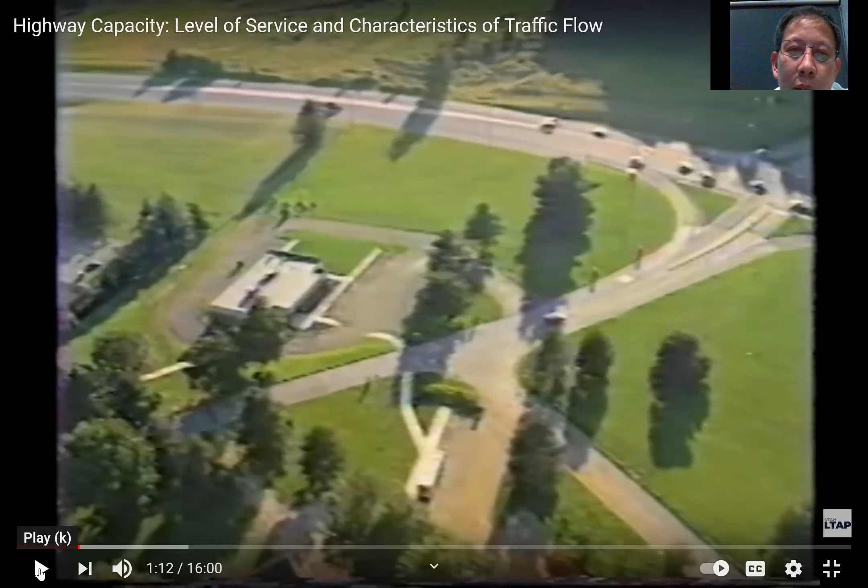Okay, let's start with the beginning, which is going to give you a little bit of overview of the American highway system. Okay, I go back a little bit.

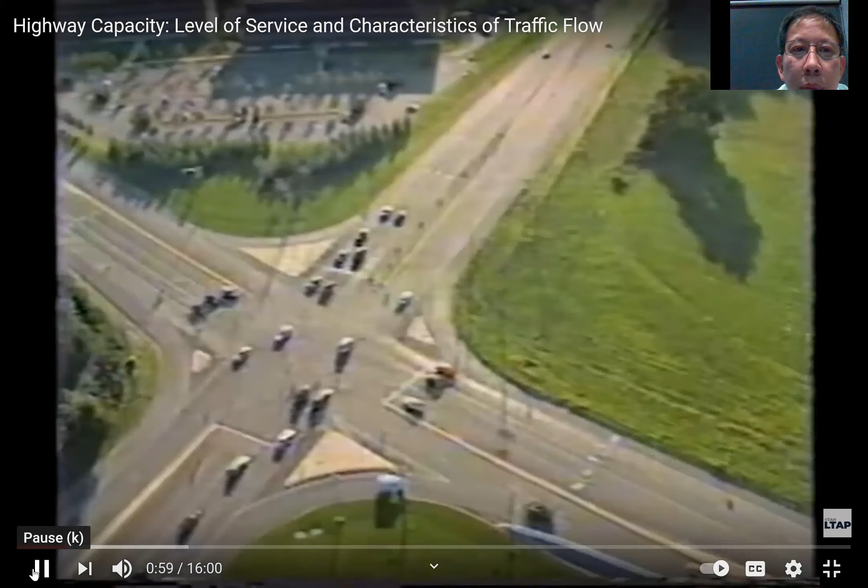Highway transportation is one of the most talked about issues in America today. With the emergence of the automobile as our primary mode of transportation, an ever-changing, ever-growing network of highways has reshaped the face of our national terrain. Yet few of us really understand how and why roads are designed. Roadways are built and rebuilt using complex engineering criteria, data, and analysis to determine what type of facility best meets the needs of the location it will serve.

Roadway design is founded upon one simple premise: improve traffic flow and safety for the people who will be using the highways. Applying basic concepts of traffic engineering, the transportation engineer interprets such factors as traffic volume, different speeds, and causes of delays to help formulate the appropriate design.

The presentation you are about to see will attempt to provide an overview of the key elements in highway design and analysis. Based on the 1985 Highway Capacity Manual, this tape illustrates some fundamental concepts and definitions used to analyze traffic flow and capacity of freeways, arterial roads, and intersections. These analyses are the groundwork for subsequent design that will upgrade the capacity and condition of our roads.

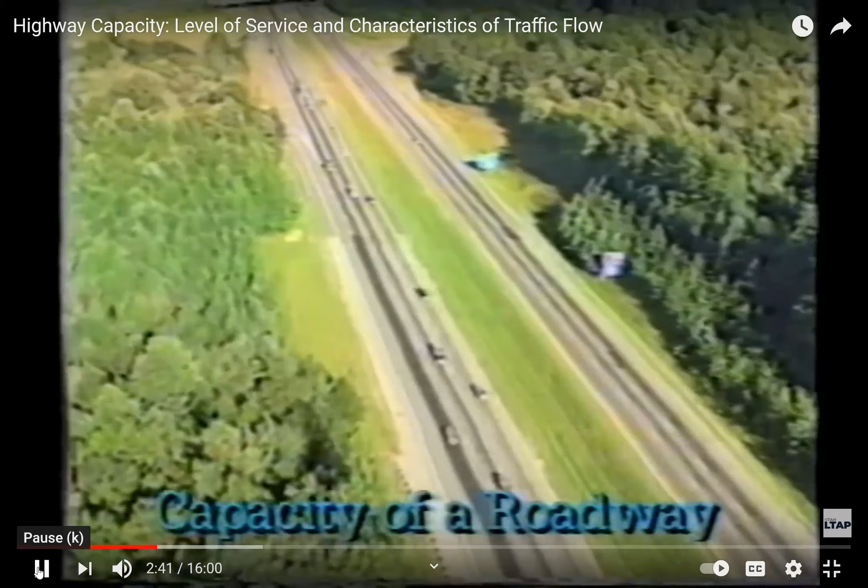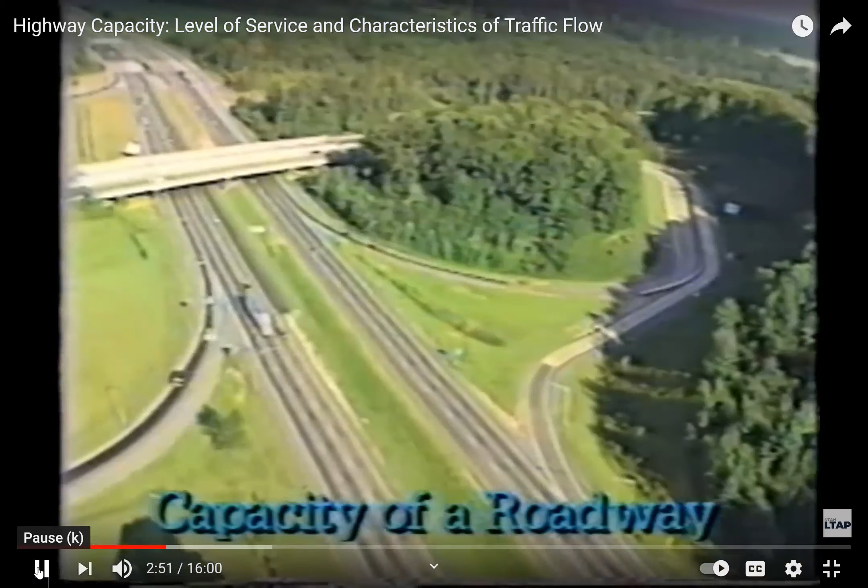The study of traffic flow and operations classifies roadways or facilities by two major categories: uninterrupted flow, such as freeways or tollways; interrupted flow, such as signalized intersections or toll plazas. Capacity of a roadway is the maximum number of vehicles that can be accommodated by any highway facility, such as a 2-lane, 4-lane, multi-lane freeway, ramp, or intersection. Capacity is also defined by the maximum volume of vehicles per hour that pass through a section of road.

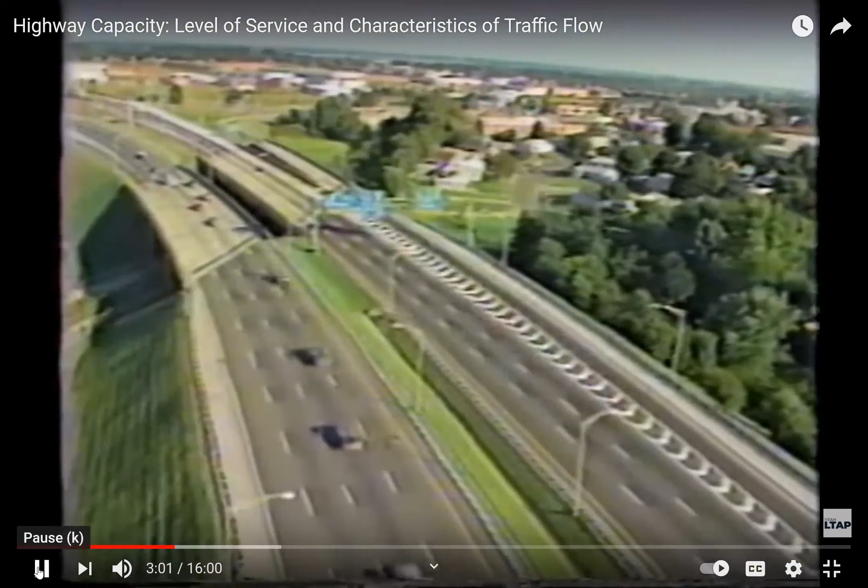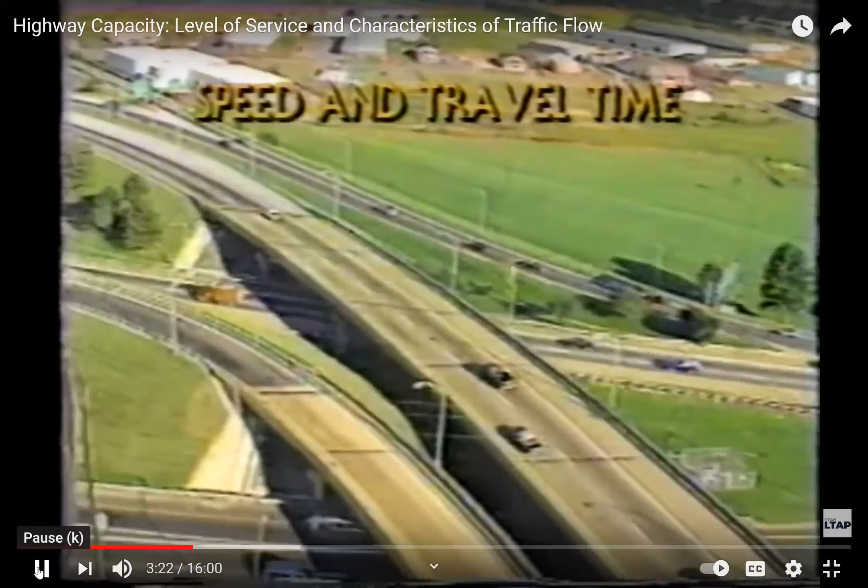Level of service is a qualitative measure used to describe the characteristics of traffic flow. The level of service describes the operating conditions within a traffic stream or the perception of same by motorists and/or passengers. Level of service, or LOS, is influenced by several factors: speed and travel time, freedom to maneuver, traffic interruptions, comfort and convenience, delay and safety.

Okay, five basic attributes: speed and travel time, freedom to maneuver, traffic interruptions, comfort and convenience, and delay and safety are something that is gonna contribute to the flow rate, okay, which imply that if these five criteria are met, the maximum capacity of that section of the road will be met. Okay.

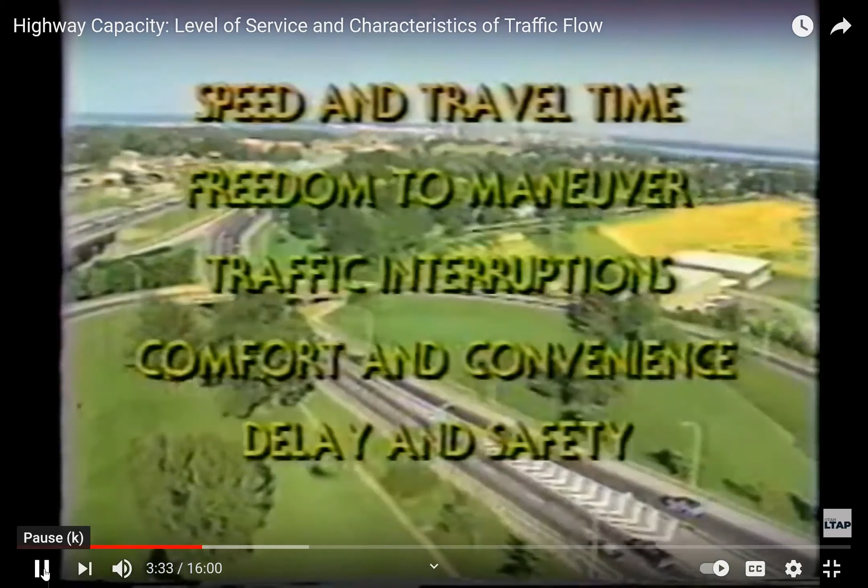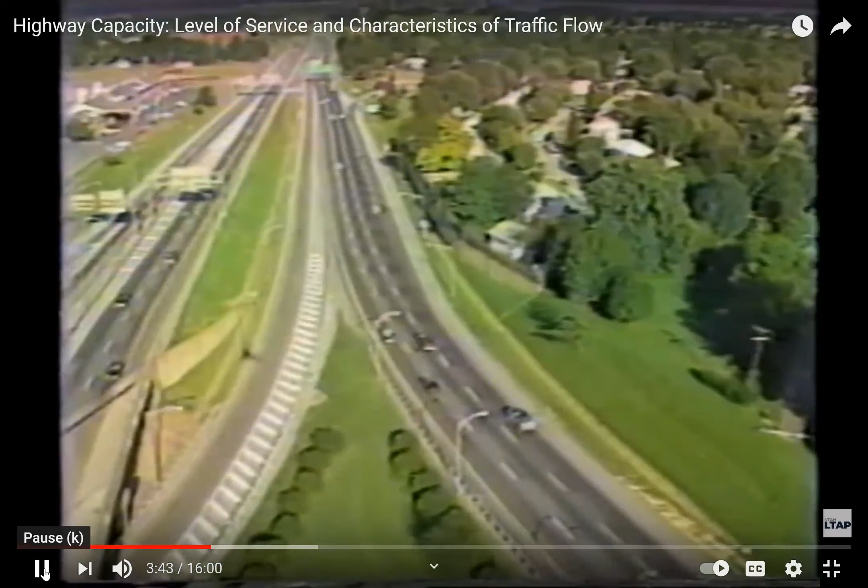The highway engineer bases the level of service calculations on features that define an ideal highway, even though actual highway conditions may vary from those standards. Those ideal features are 12-foot minimum lane width, 6-foot minimum shoulder width, the traffic stream consists of passenger cars only, all drivers are frequent travelers on the roadway and are familiar with its conditions. The highway was designed for speeds of 70 miles per hour.

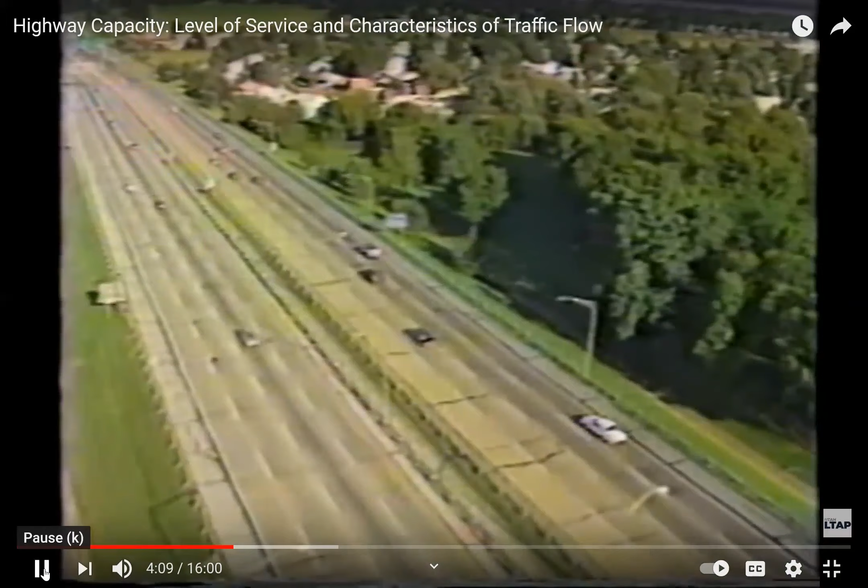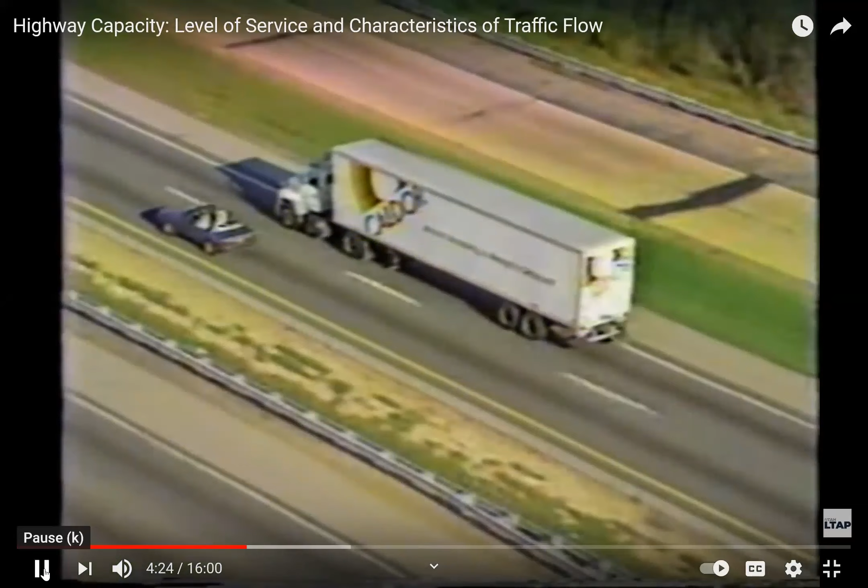There are 6 levels of service ranging from A to F. Level A is free flow and low traffic density and is the most desirable. On the other hand, level F is forced flow. Its volume exceeds road capacity, resulting in complete congestion. Let's look at examples of levels A, C, and F. Level of service A consists of low traffic density and free flow operation. The average travel speed is 60 miles per hour. The ideal volume is up to 700 passenger cars per hour per lane.

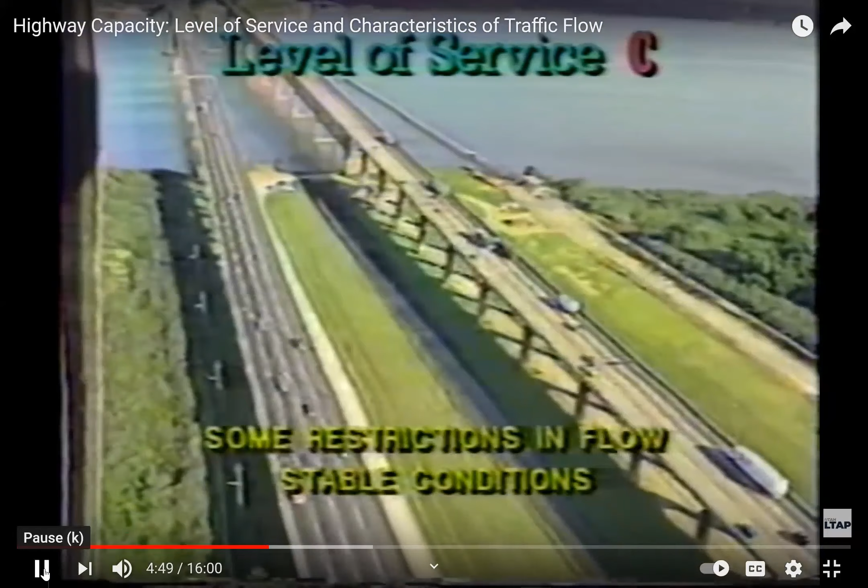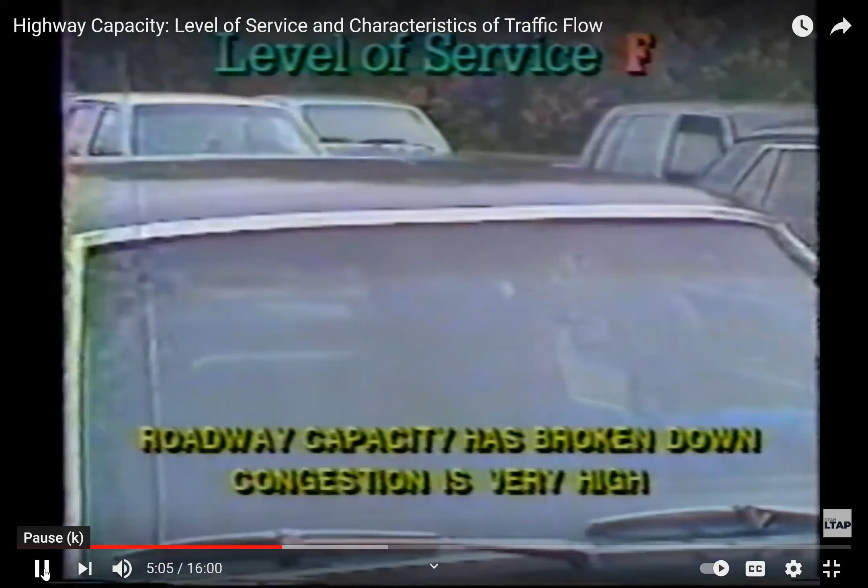Level of service C has some restrictions in flow due to a higher volume, but it is stable. Slight increases in the volume of traffic will cause substantial reductions in speed. The ideal volume for level C is no more than 1,550 passenger cars per hour per lane. In level of service F, the operation has completely broken down. Vehicles are spaced bumper to bumper. Traffic flow has now become totally unstable. The traffic volume at level F is between 0 and 2,000 passenger cars per hour per lane at best.

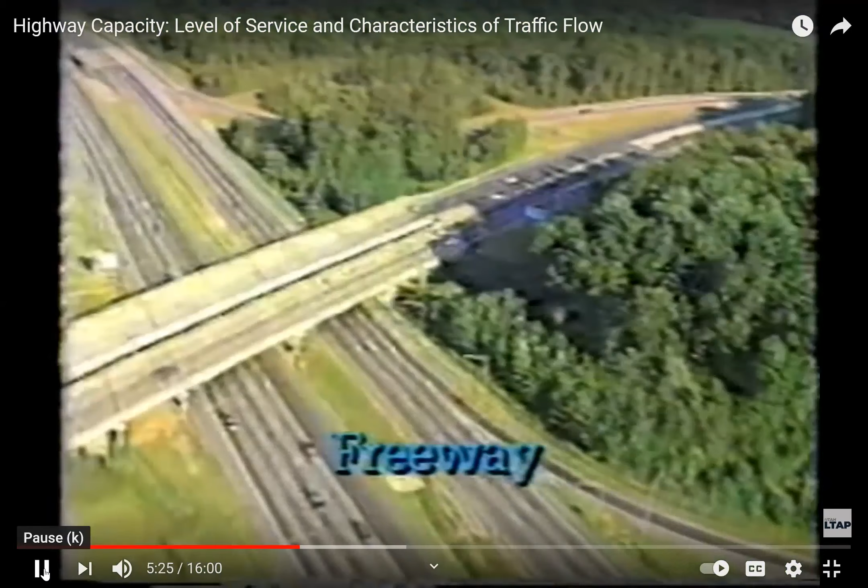A freeway is a road without intersections. All freeway entrances and exits take place at interchanges. The ideal capacity of freeways is 2,000 passenger cars per hour per lane. A 4-lane freeway, for example, will have a capacity of 8,000 vehicles per hour.

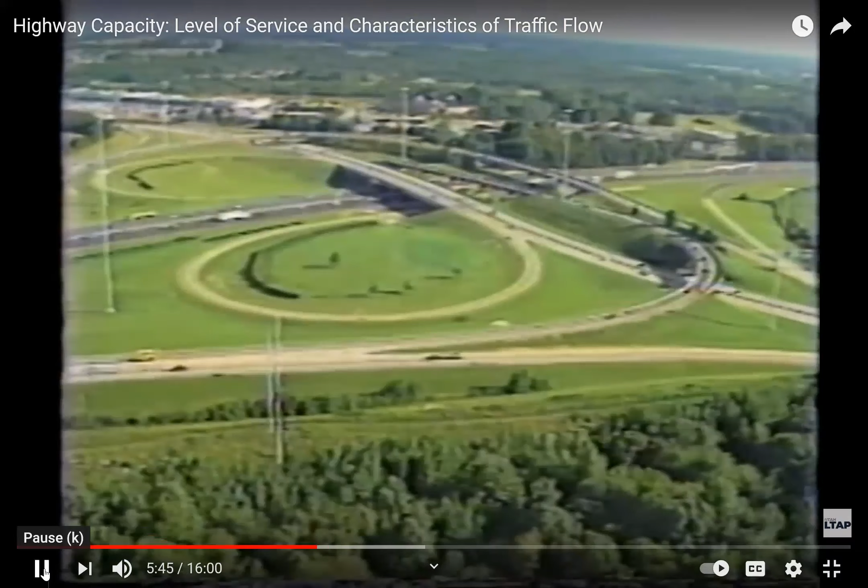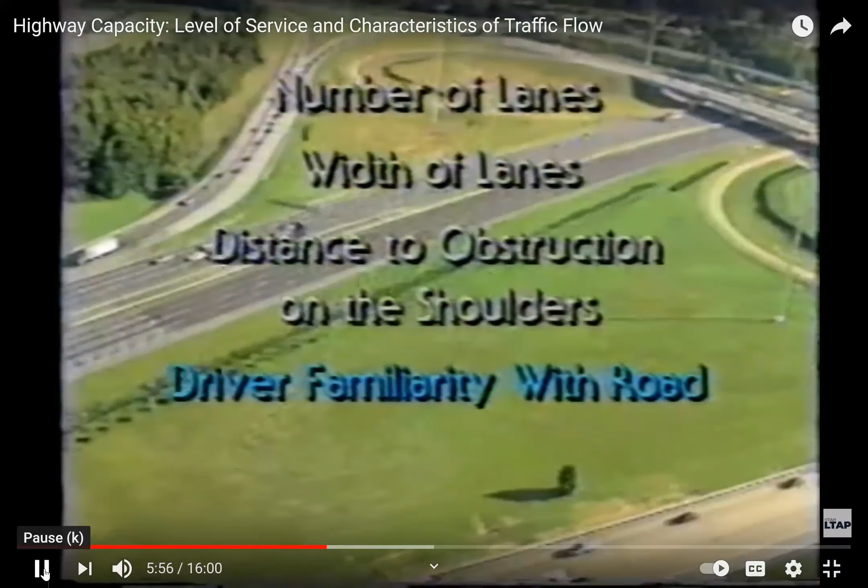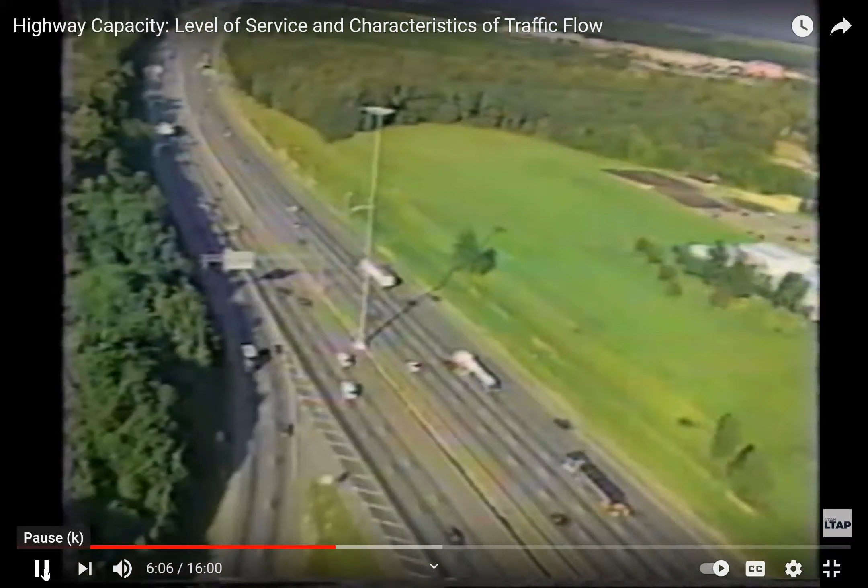In actual conditions, the total volume that can pass through a given section of a freeway is influenced by several parameters: number of lanes, width of lanes, distance to obstruction on the shoulders, driver familiarity with the road, the percentage of heavy vehicles in the traffic stream. All of these factors reduce the ideal volume to a real volume under a given set of conditions. The most significant impact on the traffic flow and capacity is generally the percentage of heavy trucks on the road.

Weaving. Okay, so they discussed the basic freeway section, and now they changed to the weaving section. Okay, now you will see this is called weaving, what you are seeing here. It is one of the most complicated phenomena of traffic flow. It is defined as the crossing of 2 or more traffic streams traveling in the same general direction along a significant length of highway without the aid of traffic control devices, signals, or stop signs. Put simply, it means changing lanes within a section of a limited length.

Weaving most commonly occurs when traffic moves into a merge area followed immediately by a diverge area. Because of intense lane changing in weaving areas, traffic is subject to more turbulence than normally found on basic highway sections. This turbulence presents special operational problems and design requirements.

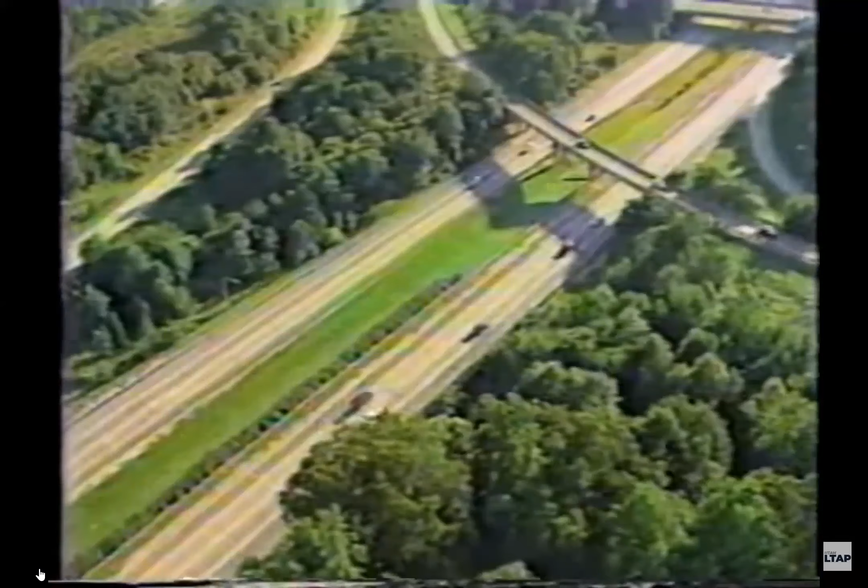Ramps are defined as the length of roadway connecting two highway facilities. Studies of ramp roadways and freeway entrances are based on special procedures which differ from standard highway analysis. The junction of the ramp with the cross street or with the street at the end of the ramp is usually a signalized or unsignalized intersection.

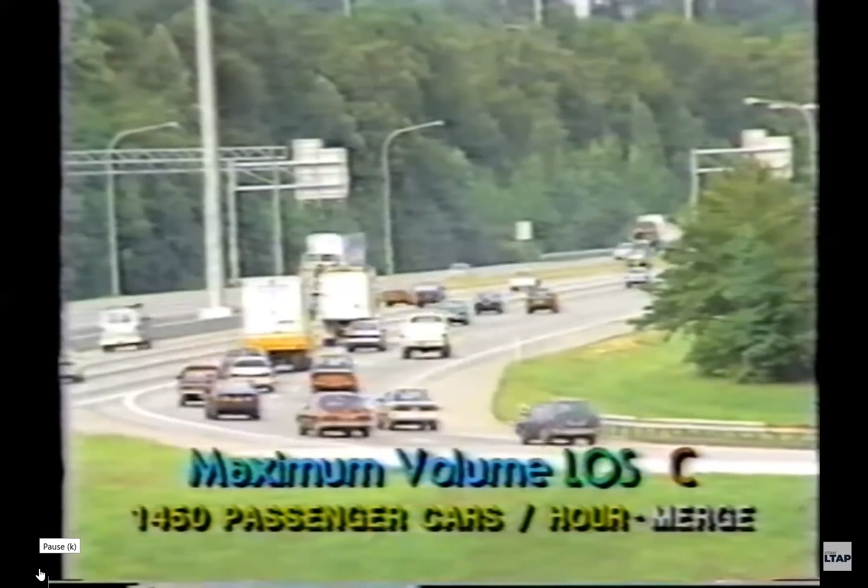Sometimes it is of interest to the highway engineer to determine the volume which can be accommodated by a given ramp junction. The maximum volume at level of service E that can be accommodated by a ramp junction is 2,000 passenger cars per hour. At a moderate level of service C, the possible volume is about 1,450 passenger cars per hour for the merge and 1,500 passenger cars per hour for the diverge.

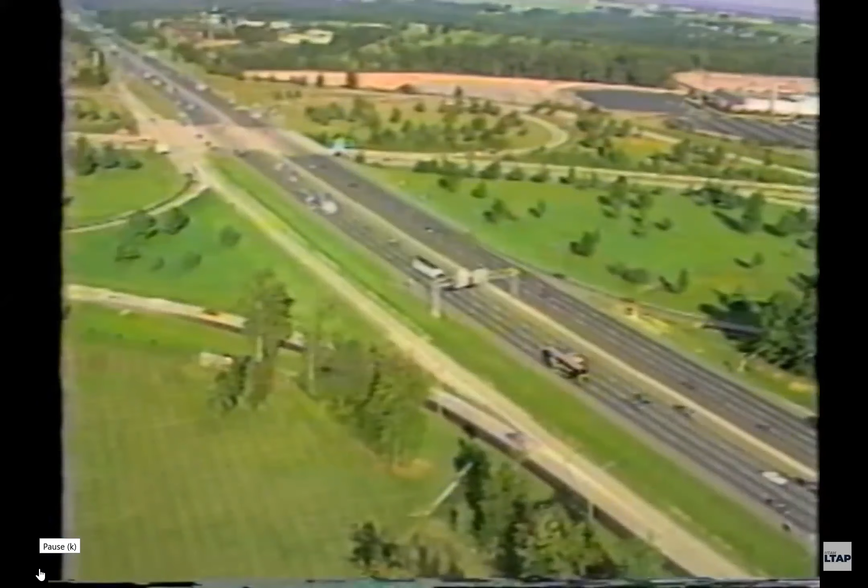The study of a freeway system integrates analysis of basic freeway sections and characteristics, such as sections without entrances and exits, weaving sections, and merging and diverging areas. So merging and diverging areas mostly happen near the ramps. So there are two types of ramps, on-ramp and off-ramp, okay? So if we talk about on-ramp, it is involved with merging, okay? If we talk about off-ramp, we will talk about diverging.

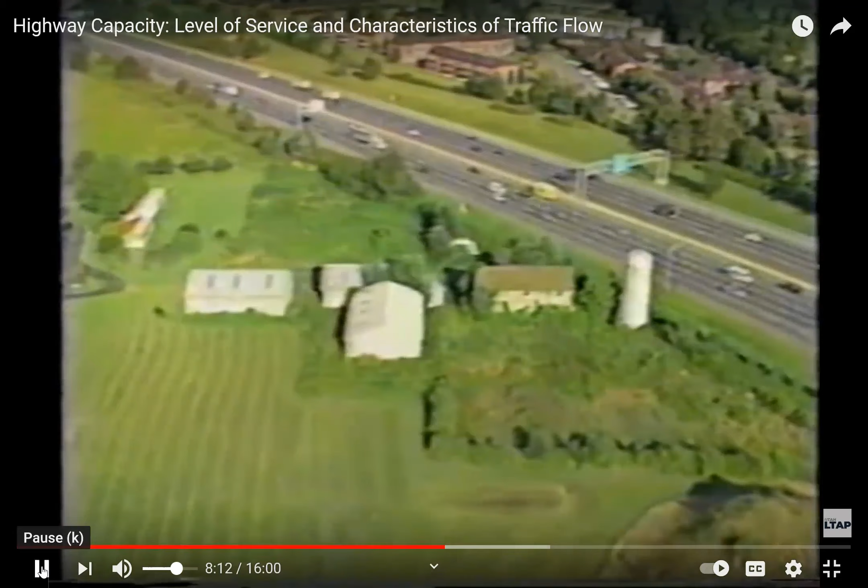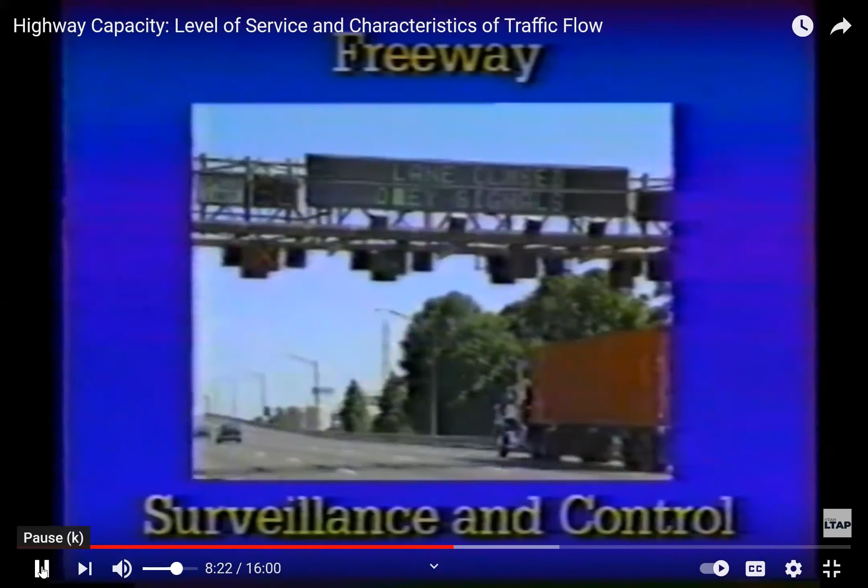Several factors can affect freeway operations in general and freeway systems in particular. The analysis must take into account the characteristics of a continuous longer freeway facility, not just an isolated section. Freeway surveillance and control. The objective of freeway surveillance and control is to maintain traffic flow at or near capacity and to minimize the impact of breakdown conditions.

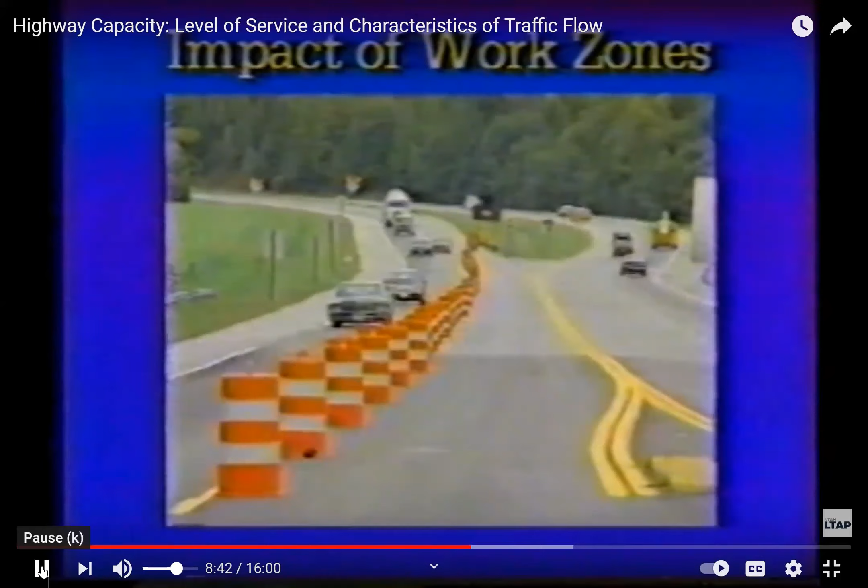Impact of work zones. The roadway system needs to maintain a continuous reconstruction, rehabilitation, and maintenance program in order to keep it in good operating condition. The engineer needs to know the impact of a construction project on the traffic flow. The capacity of work zones predicts the decline in volume caused by lane restrictions during freeway reconstruction. The reduction in work zone capacity is greater than the relative reduction in the number of lanes.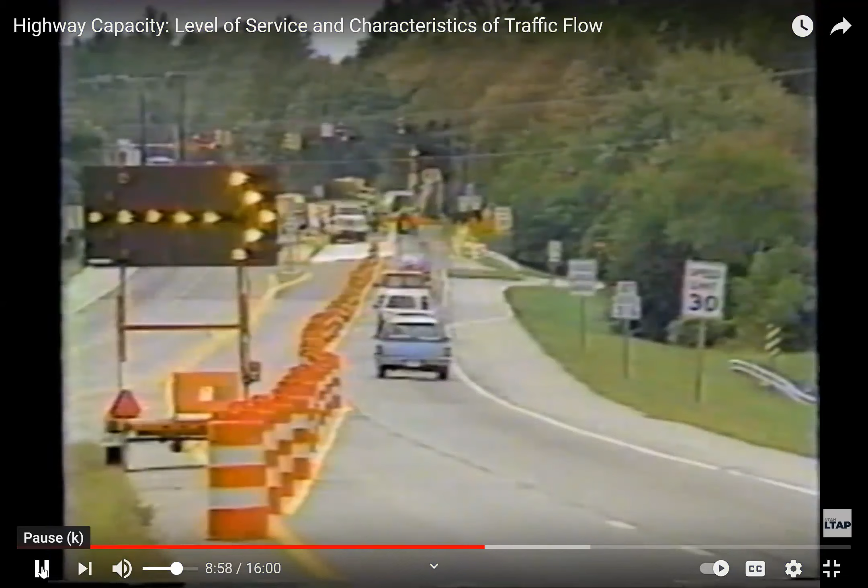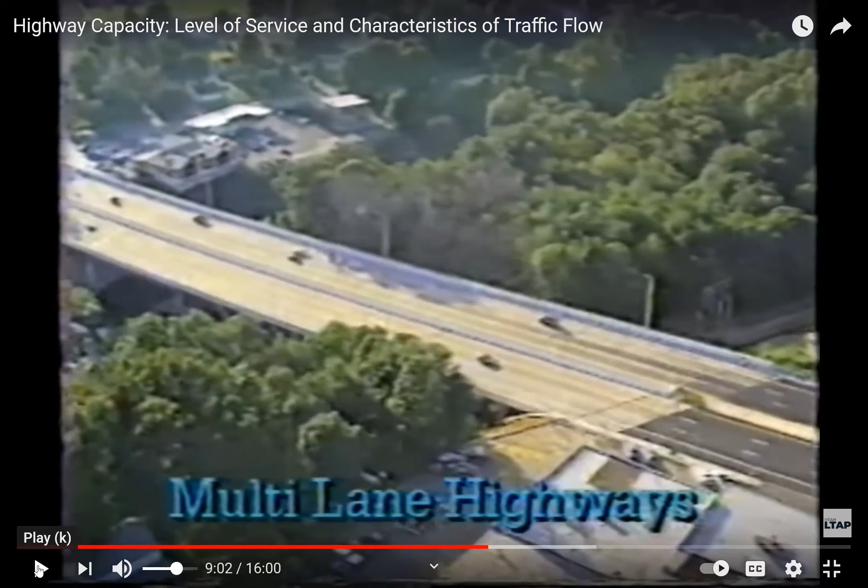On multi-lane highways... Okay, they talk about freeway, they talk about on-ramp, off-ramp, and now they change to multi-lane highways. Okay, so you have to see some different configurations of facilities here. The flow is normally uninterrupted. For the flow to be considered uninterrupted, a minimum of 2 miles between signals is required. Closer spacing classifies the route as an arterial road. Speed on multi-lane highways is more sensitive to the volume than freeway speed.

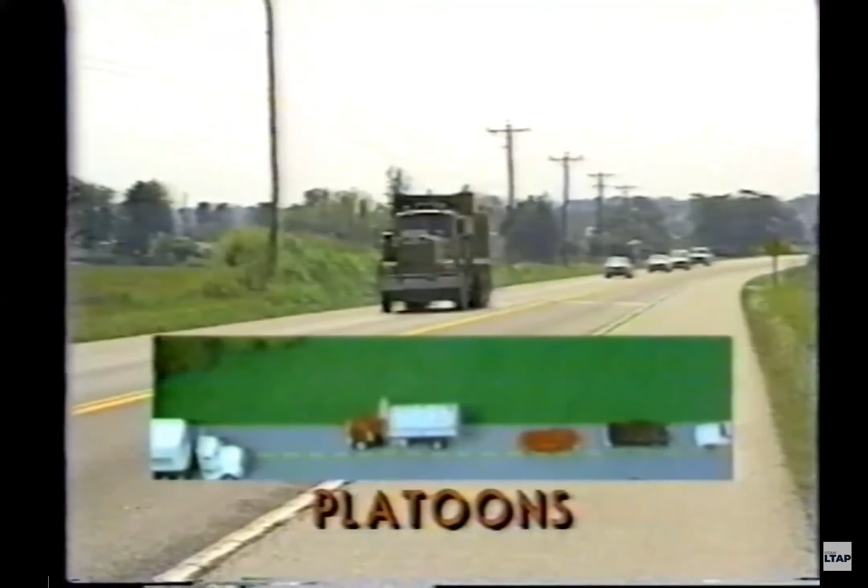Two-lane highways differ significantly from other roads. The basic operational problem is the formation of so-called platoons behind slow-moving vehicles, typically trucks. Opportunities to pass may be restricted by opposing traffic and/or by limited sight distance. Another important factor is the friction which exists between the two lanes, since each lane is closely affected by traffic in the other. Therefore, total flow in both directions must be analyzed. The ideal capacity of two-lane highways has been established at 2,800 passenger cars per hour for both directions.

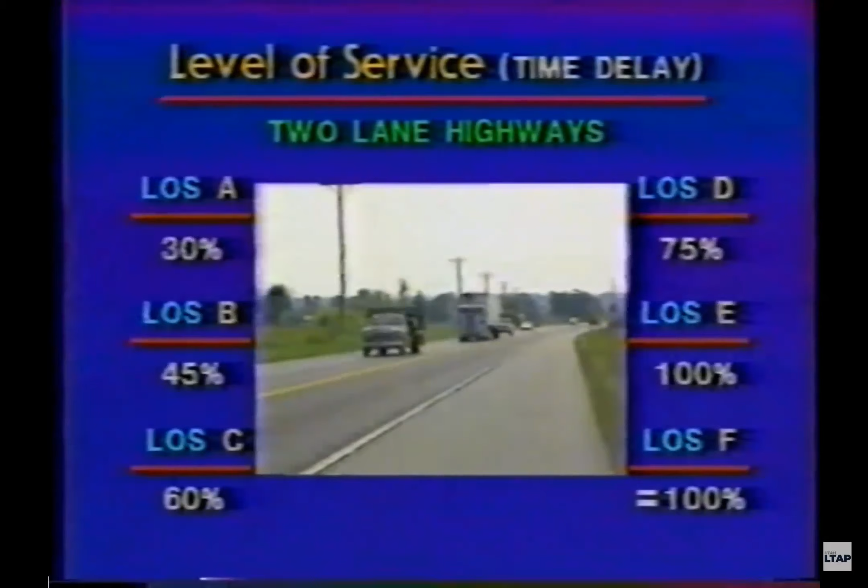5 basic parameters determine actual capacity of two-lane highways: the percentage of no passing zones in the road, type of terrain, such as level, rolling or mountainous, or grade of road, percentage of heavy vehicles in the traffic stream, the directional distribution of traffic traveling in each direction, the width of the lane, and the shoulders. The level of service measurement for two-lane highways is the percentage of time delay. This is defined as the percentage of total travel time during which a driver in a platoon is behind slow-moving vehicles and is unable to pass. For example, at level of service A, a driver would travel behind a truck for 30% of the time.

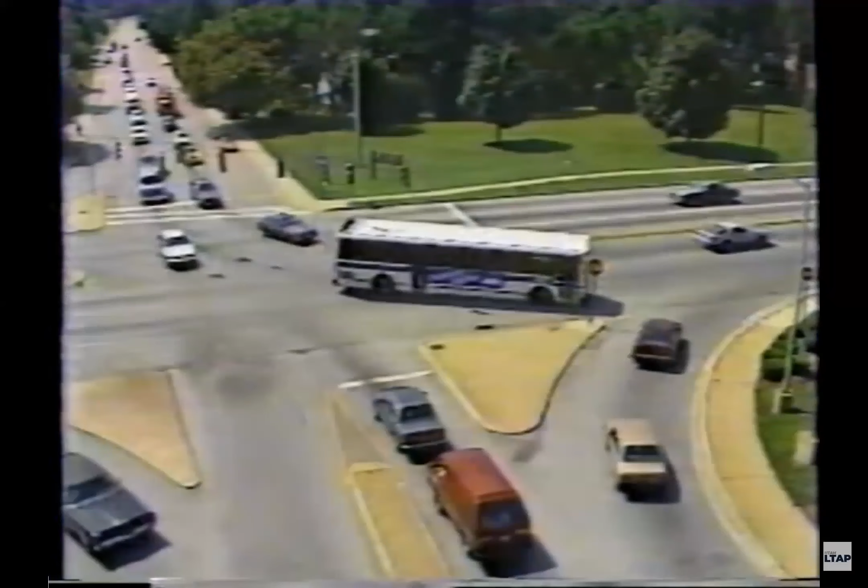The congestion and delay at signalized intersections have a significant effect on most drivers: people who travel to school, people who travel to and from work, people who travel to shopping or social events. Analysis of signalized intersections is based on the most frequently used movements of the intersection. It focuses on lanes or groups of lanes which control the requirements for green time allocation. The average stop delay of a vehicle at an intersection during a 15-minute period serves as a criterion for the intersection's level of service. For example, during level of service D, the stop time delay of vehicles stopped at a light would be approximately 40 seconds or less.

These delays are highly dependent on the quality of the signal progression, the length of the signal cycle, the green times, and the volume to capacity ratio. The operation of signalized intersections is affected by a wide range of variables. Generally, they fall into three classes: traffic characteristics, roadway configuration, type of signal control.

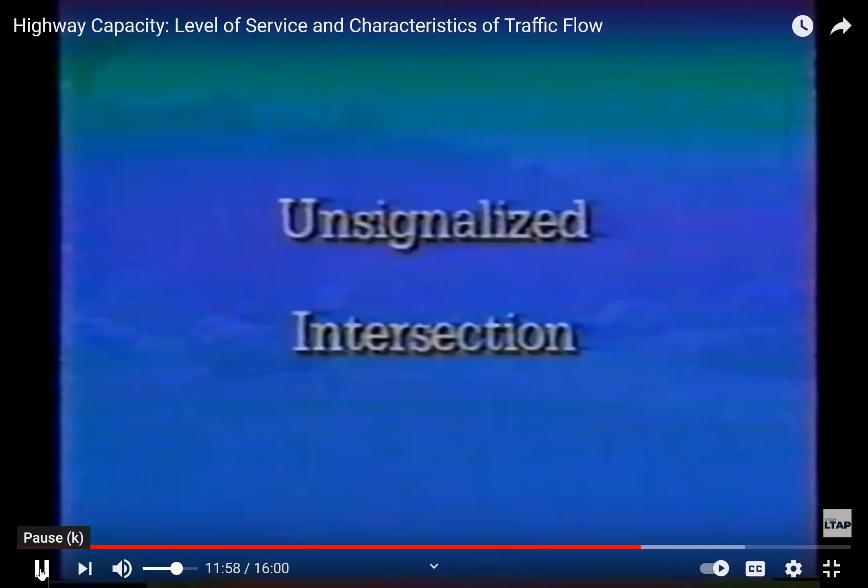Unsignalized intersections are usually controlled by stop or yield signs. These intersections are commonly analyzed by the capacity and operation, that is, by calculating available capacities, delays, and average length of a line of traffic stopped at the intersection. At unsignalized intersections, the right-of-way is always given to the major street. Drivers on the minor street must let the main street drivers pass before merging into, turning onto, or crossing the main street traffic flow.

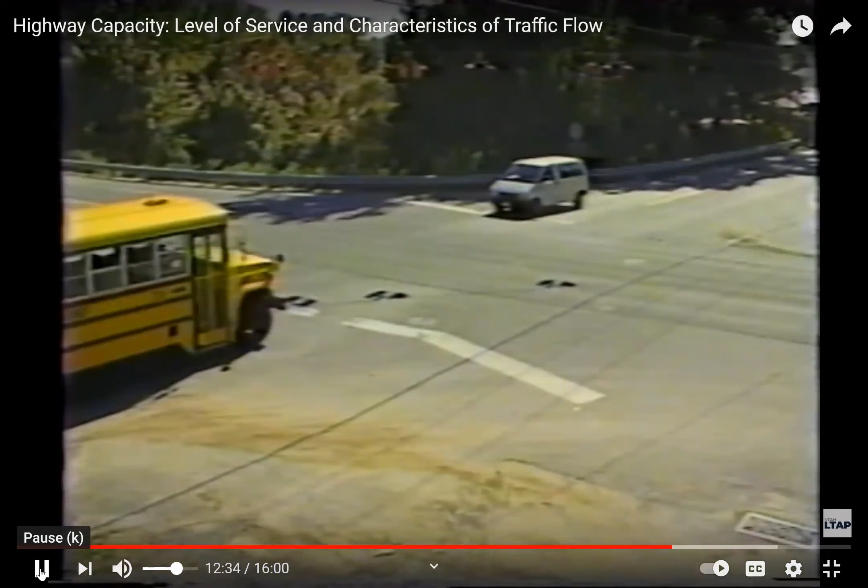Analysis of unsignalized intersections is based on the acceptance of space interval between main street vehicles and drivers on the side street. The driver on the minor street evaluates the interval and accepts it or rejects it. If the interval is accepted, the driver pulls onto the main street. If it is rejected, the driver waits to evaluate the next gap interval.

A left turn lane is important to the safety and service of unsignalized intersections. A road with left turn lanes into supermarkets, shopping strips, or developments normally has a better safety record and reduced delays and interruptions for through vehicles.

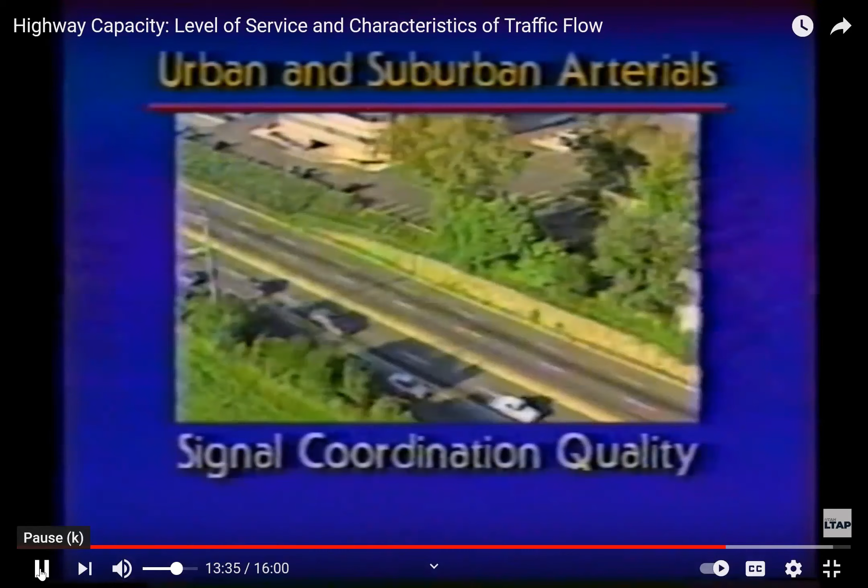Spacing of signals at less than 2 miles apart qualifies a major road as an urban or suburban arterial. Because of traffic signal cycles on these highways, vehicles often travel in platoons. The quality of operation is controlled primarily by two factors: signal coordination quality, and level of service at individual intersections along the highway.

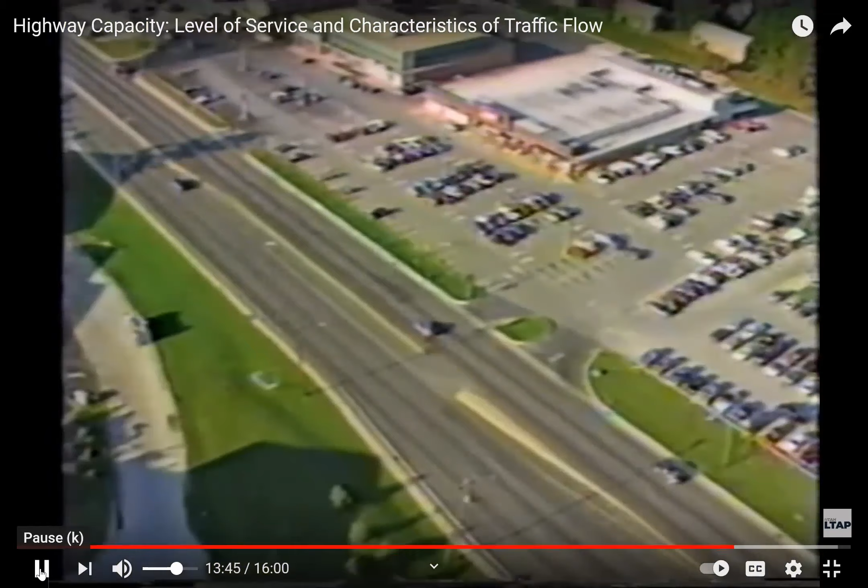Since signals control vehicle flow, the capacity of arterial streets depends on the capacity of its signalized intersections. Arterial level of service is based on the average travel speed for all through vehicles on the arterial under consideration. In addition, several other criteria come into play when planning a new facility or upgrading an existing one. Those criteria include number of signals per mile, speed limit, pedestrian interference, and roadside development.

Arterials with many closely spaced signals may operate at a lower level of service than arterials with fewer signals. This suggests that closely spaced intersections may have a negative effect on traffic flow, and special design measures, such as improved coordination between signals, may be needed.

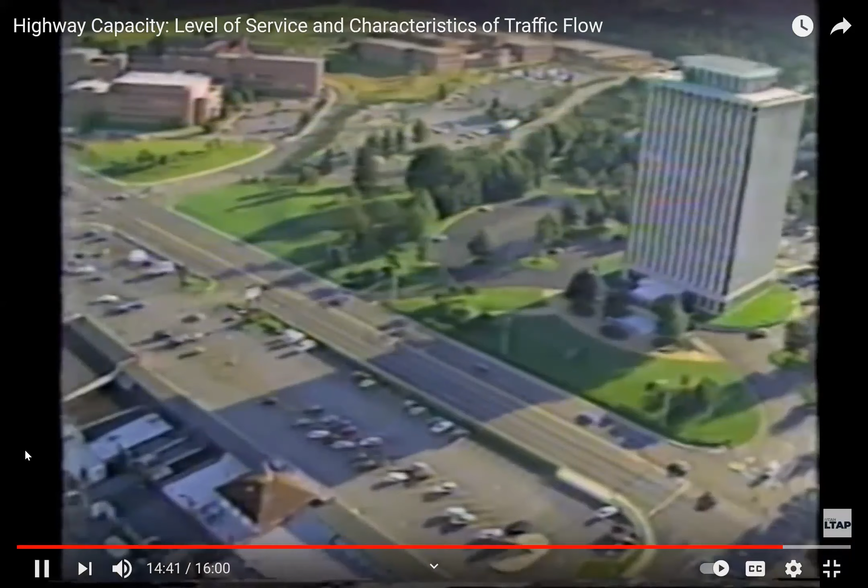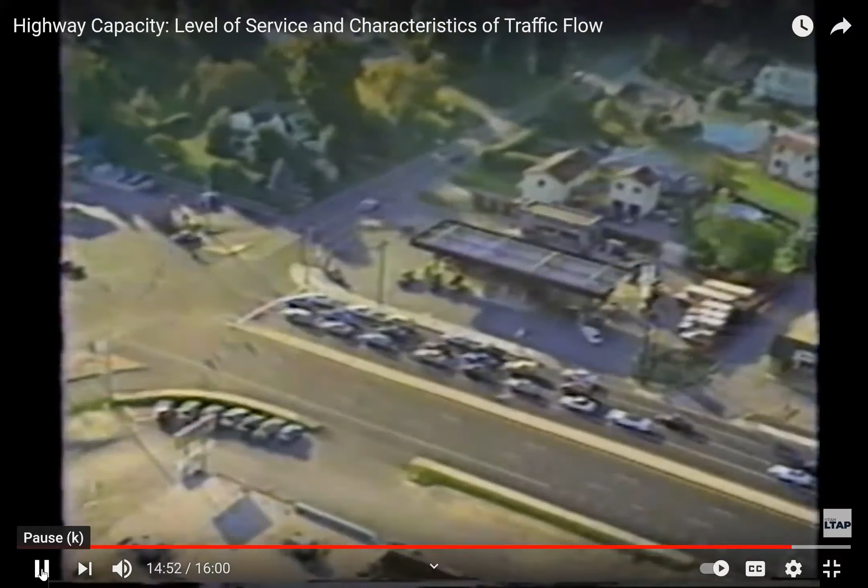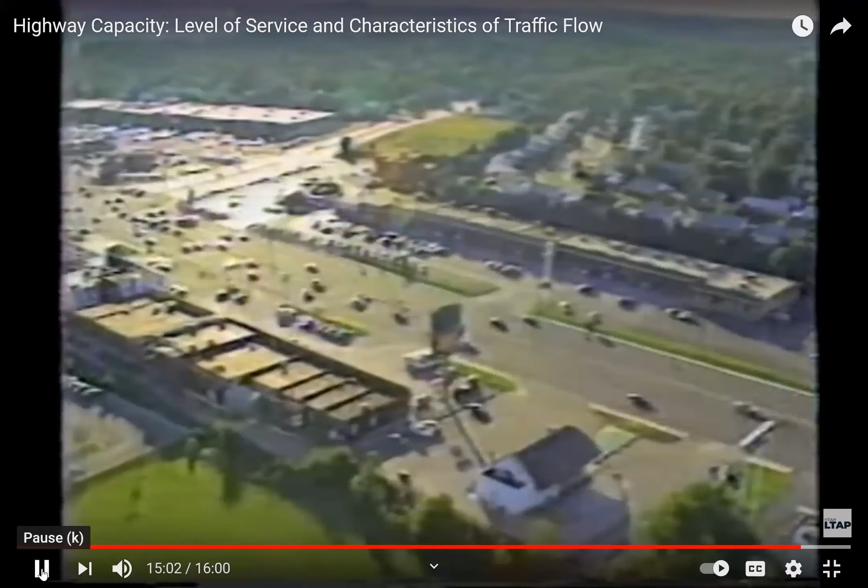Roads are a critical part of the infrastructure that supports growth and land development. Over the last decade, we have witnessed increased citizen concern about roadway construction, placement, and effect on the community. Citizens play an active role today in land rezonings and regulatory activity, issues which impact upon road development. A general understanding of transportation engineering concepts and definitions will help civic and political leaders better understand the rationale behind proposed roadway design and to make more informed decisions about the highway infrastructure.

Okay. If you want to repeat that clip, you can search it on YouTube. You can search for highway capacity and level of service to watch it again. I cannot find one that has comprehensive information about the differences between the definitions of highway, freeway, those kind of things. I thought only this one is quite comprehensive.

The movie I think was made maybe 15 or 20 years ago. It's quite old, and they've been using a helicopter rather than a drone. I think if somebody can do this kind of thing, it's going to be good for students and for others to understand the concept of freeways, highways, intersections, and those kind of things.

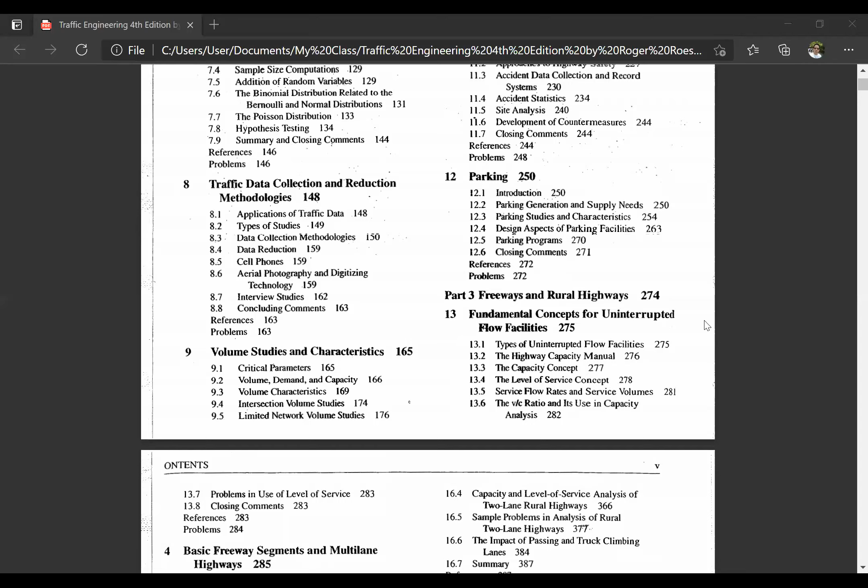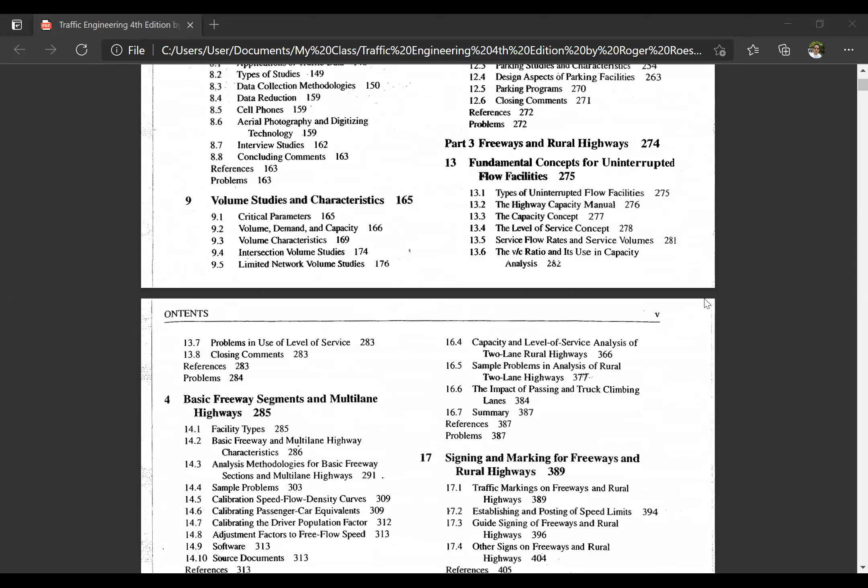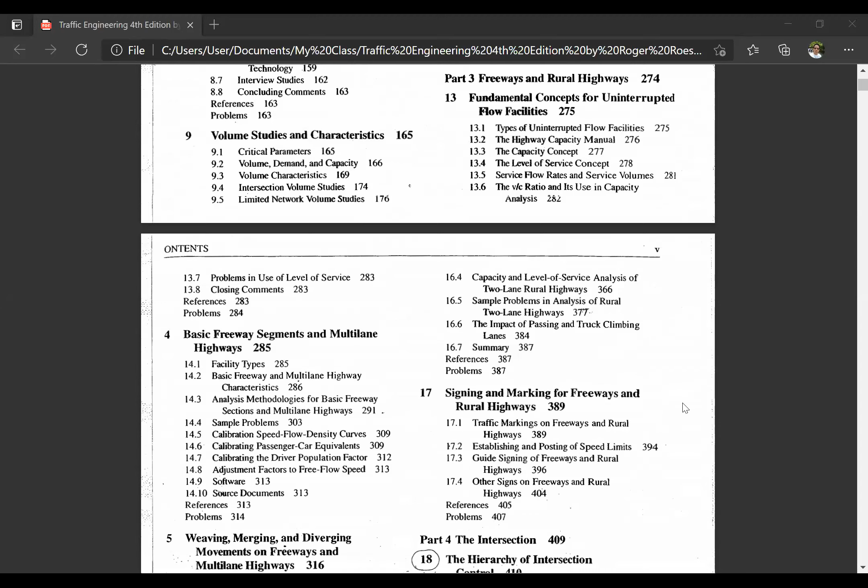Okay. So if you remember, I sent you this file to download already, right? Traffic engineering, and I come back to chapter 13, which I'm gonna talk about today, about the fundamental concept of uninterrupted flow. Okay. Chapter 13. Okay.

I think the purpose of this chapter is to let you guys understand various objectives. First, to understand the meaning of capacity, and this, like I said, is the heart of transportation issues. Why is capacity the heart of transportation issues? Can you guys guess?

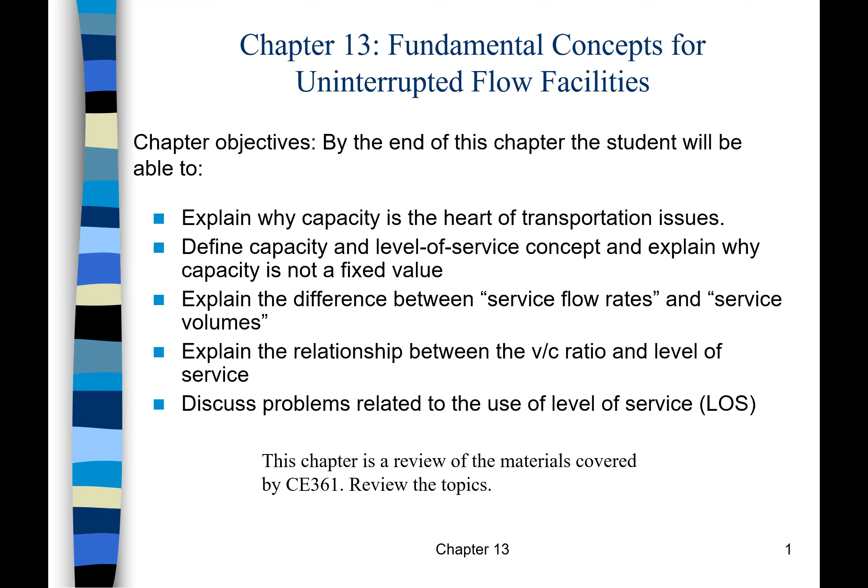If it's over capacity, what happens? Definitely, the speed and the flow cannot go as expected, as designed. So it becomes level of service F, which you have seen in the video clip, that level of service F is bumper to bumper congestion, right? Okay, and later on, they talked about the use of level of service. What is the problem about how to use this? If you notice, the term level of service is rather hard to understand, because you need to look a little bit closer at how to define the level of service. And the level of service of a freeway segment, of a multi-lane segment, of an intersection, of the ramp, they are totally different too. So I give you a heads up why it's a problem, okay?

So, types of uninterrupted flow facilities. I think you have seen it on YouTube earlier already, okay? Anyway, in this chapter, we're gonna discuss uninterrupted flow.

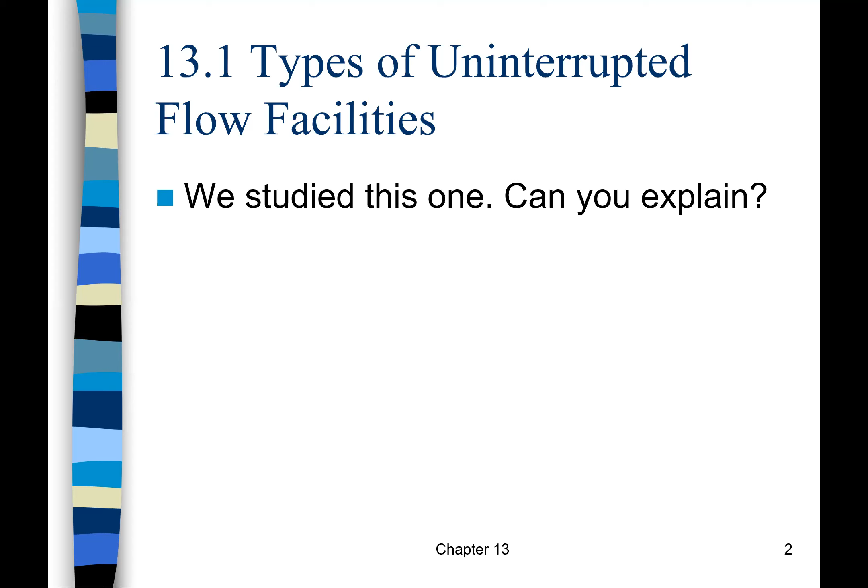In the HCM, or Highway Capacity Manual, it talks about how much traffic a given facility can accommodate. This is the meaning of capacity, okay? But the HCM has been developed in many versions. And I think the version in the clip that you just saw was 1985, okay? The 1985 one is the one that we saw.

But the one that we study is 2010, okay? It's 2010, and it hasn't been edited again. I heard that they were updating some chapters, especially things that involve autonomous vehicles. Autonomous vehicles, I think some of you may already have learned about, cars that drive by themselves. Many projects in China, America, Singapore, or South Korea started doing this type of vehicle in commercial mode, but they haven't reached the highest level, which is fully autonomous.

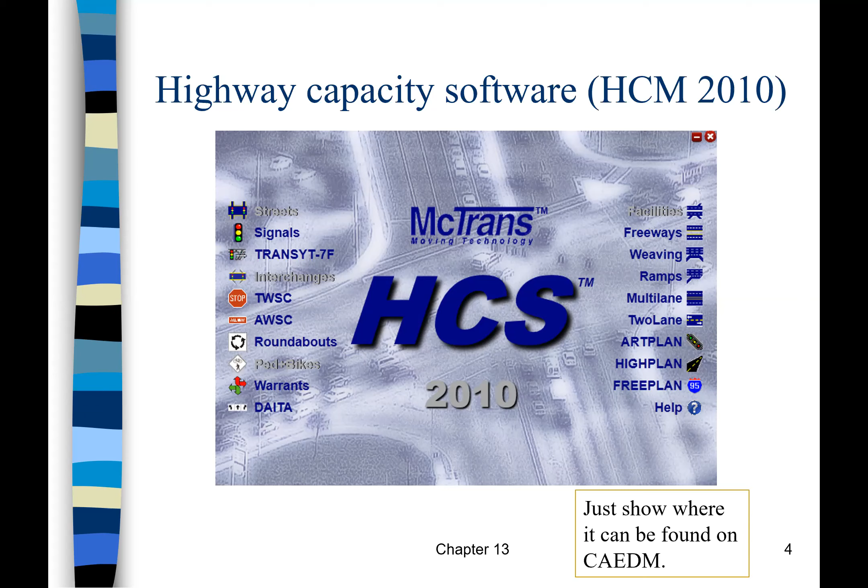And more advanced software is AIMSUN, for example, or the other one, VISSIM. Those two types of software have been widely used around the world now. If you are working in a consulting firm, I think it's unavoidable to use them, which is a great opportunity to try. But anyhow, some of the basics that you're going to learn here will be useful when you try to input those parameters in the software. Okay.

The concept of capacity is stated here. The capacity of a facility is the maximum hourly rate at which persons or vehicles can be reasonably expected to traverse a point or uniform segment of a lane or roadway during a given period of time under prevailing roadway, traffic, and control conditions. Okay. The last,

Oops. Somebody called me. I think we'll stop a little bit here. Sorry for the interruption. Share screen again.

Okay. So they break it into different parts, so this sentence has several parts that you should consider. I think the last part here is easy: under prevailing roadway, traffic, and control conditions, giving traffic, roadway, and control. So along the clip, remember, they stated a 12-foot lane, how many lanes in one direction, road users familiar with the facilities, those kinds of things. Okay.

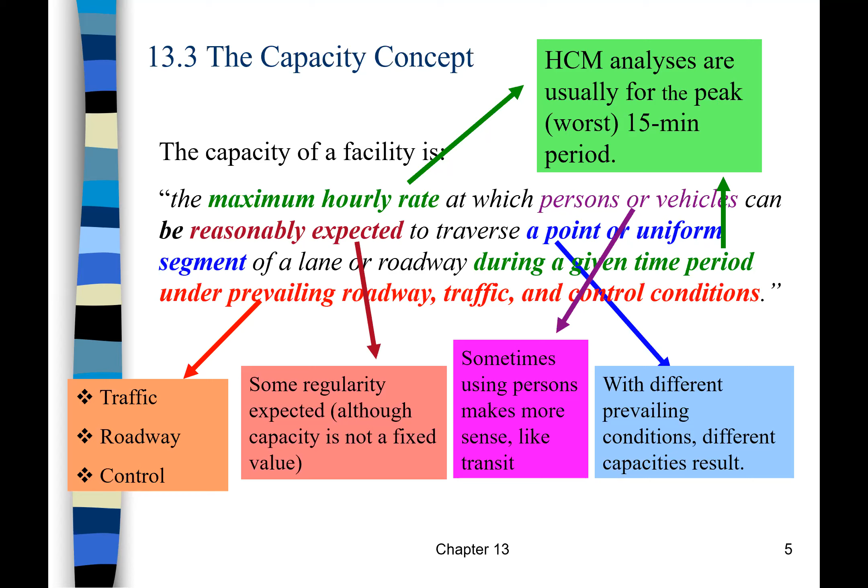So we analyze that, and we will see that the flow is showing more vehicle demand passing through that section. So anyway, it's hard to explain. If you see some examples, you will understand more. Okay.

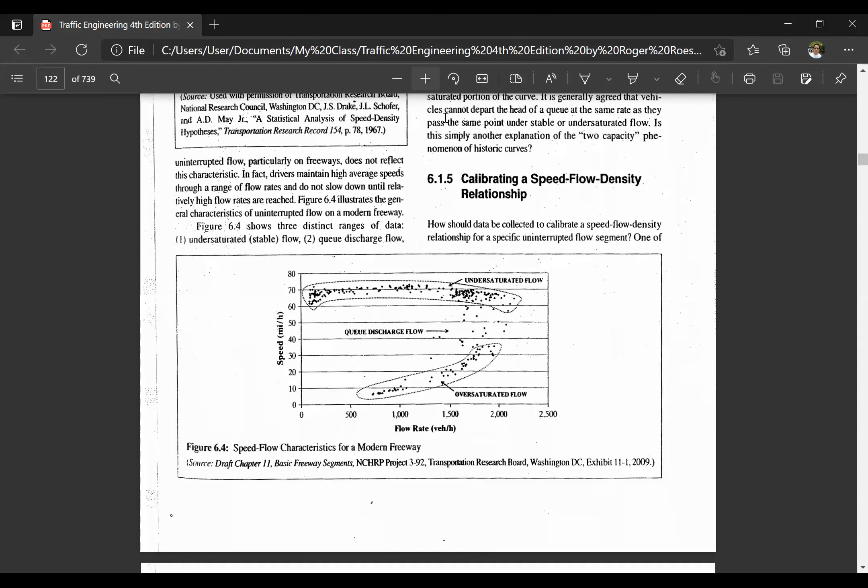This graphic is showing the relationship between speed and flow rate. Under this group, the first group, this is undersaturated flow. When we talk about free flow speed of 70 miles per hour, the flow is kind of stable. And increasing

a little more, the flow rate starts to get more and more, until this area becomes the maximum flow rate, about 2000 something right here. Beyond this, the speed will drop and it gets into oversaturated flow. The area here causes the traffic jam, where level of service F is expected.

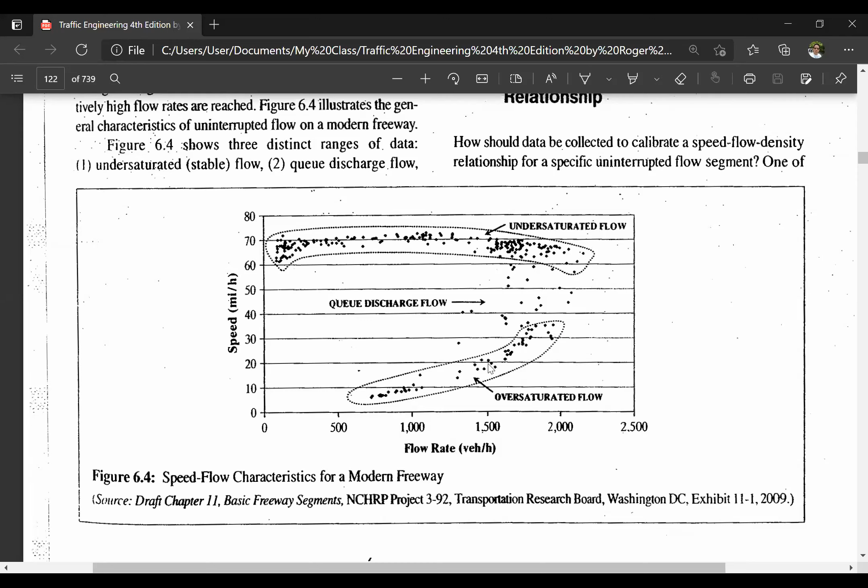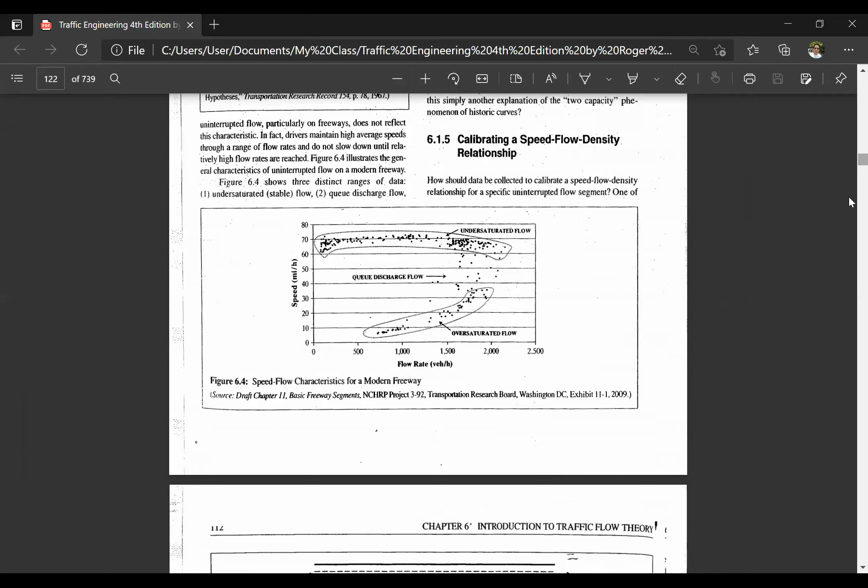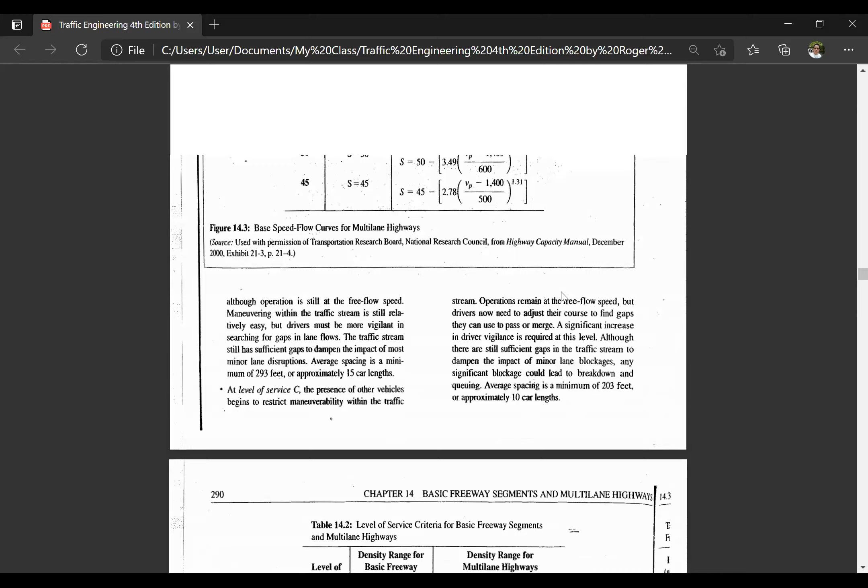So go to... it's necessary to see this, otherwise it's not going to be easy to understand. If you see those graphics that I showed you in the previous chapter, this part is the top one. Free flow speed at 75 miles per hour.

This line, the one that we compare at 70 miles per hour, is this line, before it reaches this area, before it breaks down. It's level of service E, right? The density is 45 passenger cars per mile per lane. Beyond this is level of service F, and the flow of traffic goes back to here. This part didn't show the behavior, but the graphic I showed you earlier shows the traffic jam condition at level of service F.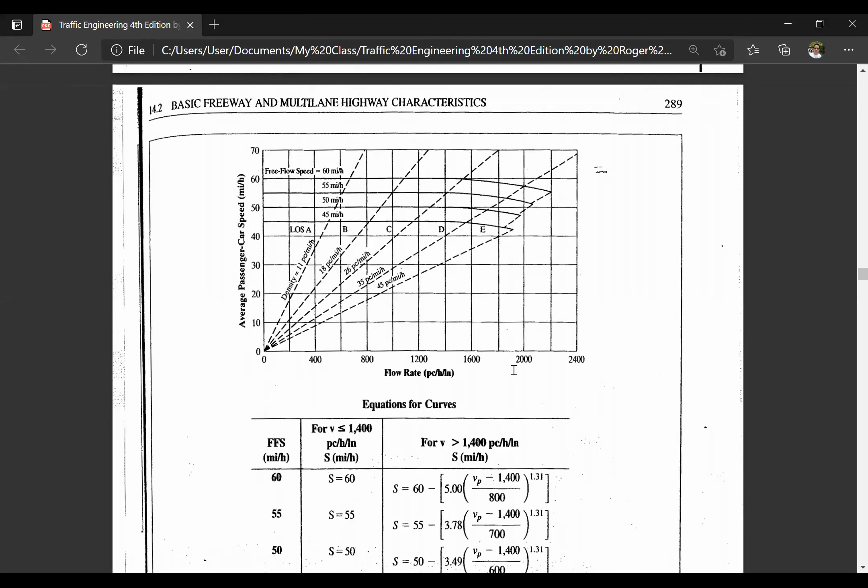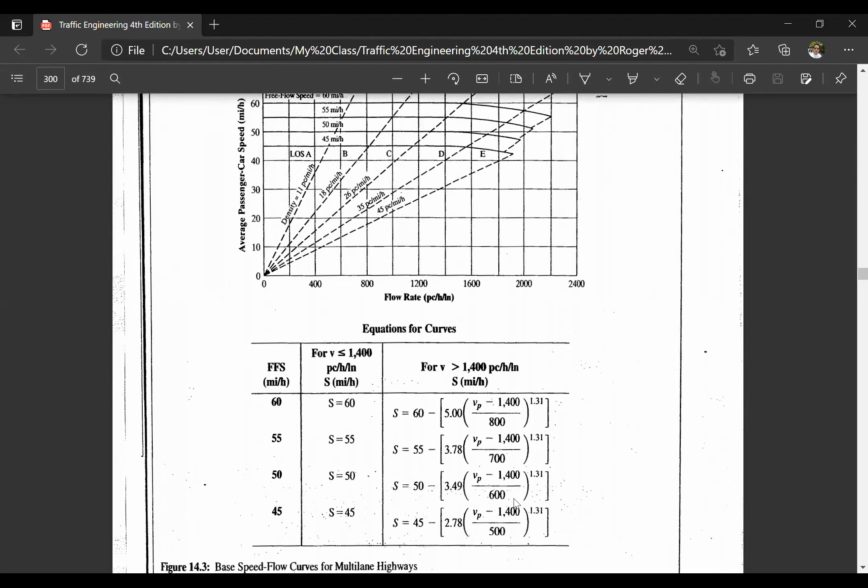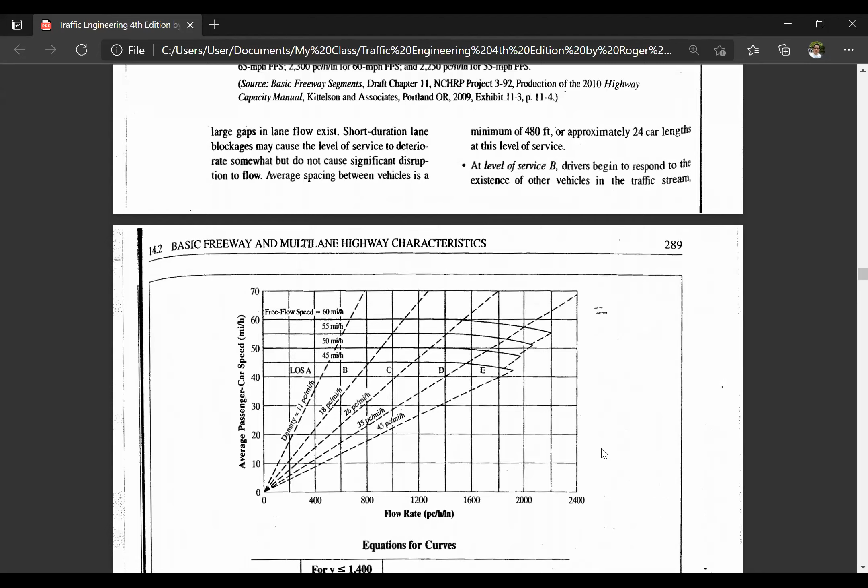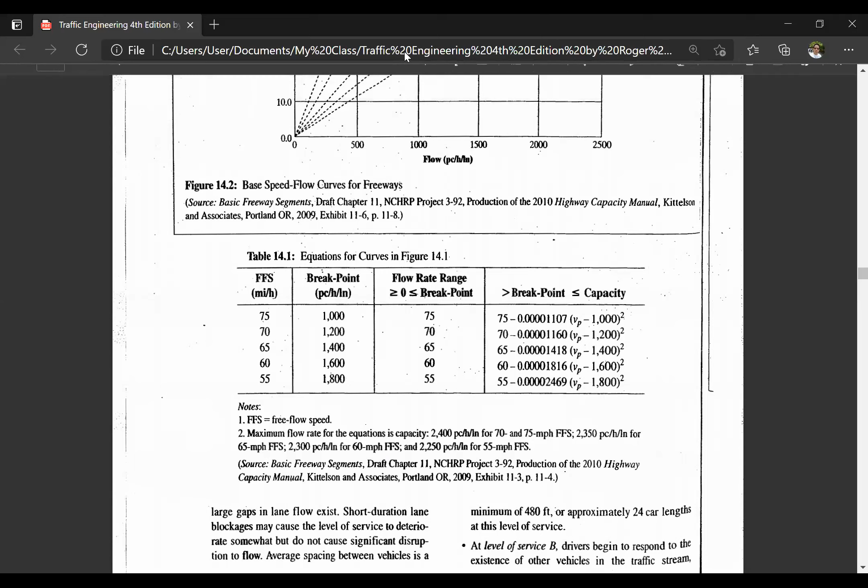The equation of the graph can be computed using these equations. But I don't want you to remember all of this; I just want you to understand the differences between level of service of different facilities and the meaning of capacity. That's more important. At this point, anybody didn't understand? Everyone understand?

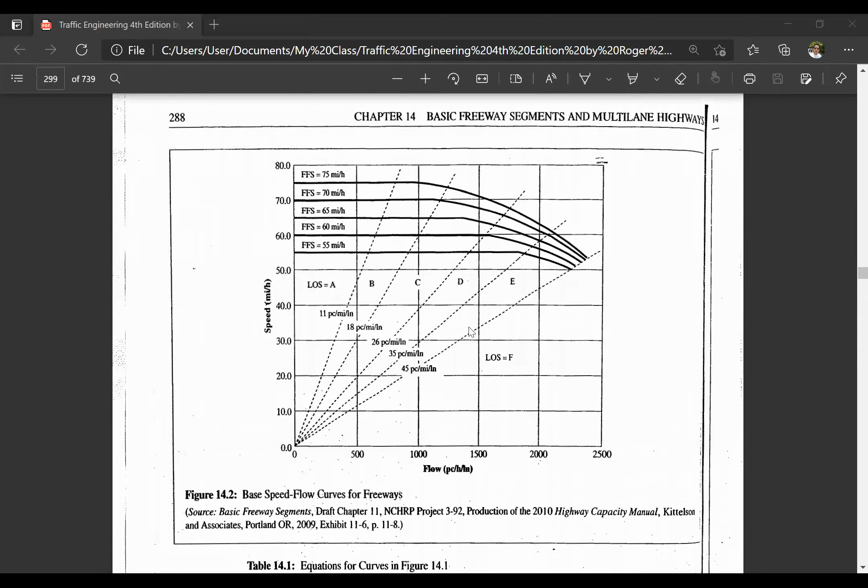That's why you see the comparison. Oops. Right here, okay.

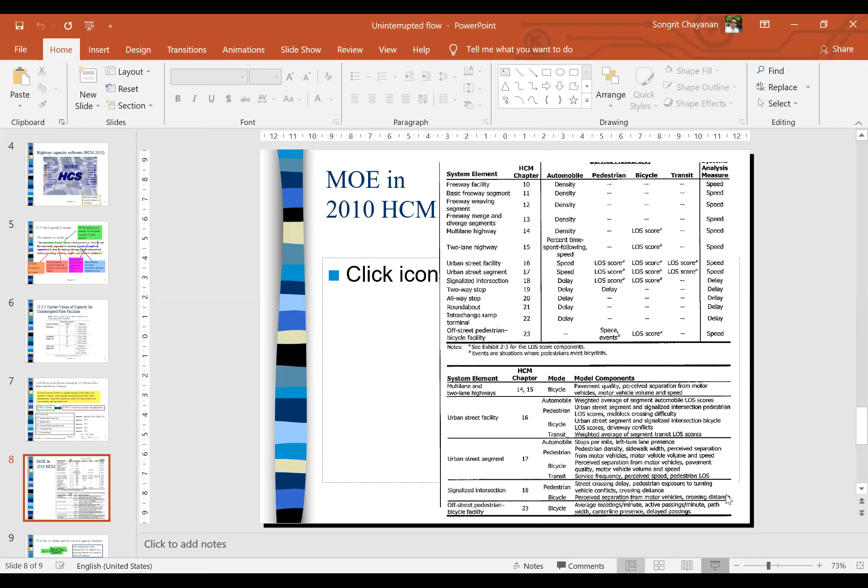Okay, signal delay, vehicle delays, not passing. 2-lane highway, percent time spent following the truck, right? The YouTube video also mentioned platoon. Remember platooning? The definition of platooning. I don't know if you get that word or not, but you should go back and find out the meaning of platooning. Platoon, P-L-A-T-O-O-N, platoon.

If you were driving in the rural area, you would quite understand this condition. When you follow slower traffic, especially a truck, there may be an accumulation of vehicles ahead of us, 4 to 5 cars following just one truck. And you need to find a gap to be able to pass safely on a 2-lane road. First car goes first, second car after, or maybe 1, 2, 3 cars go at the same time.

With this condition, you understand that it impacts a lot the capacity of the road and also the safety, in terms of you need to find a suitable situation to pass safely. Some who do not obey the traffic laws very well will result in very serious injury or damage to the car, especially passing at curves. So the design of the geometry on two-lane highways is important to identify where they should start to pass or shouldn't pass.

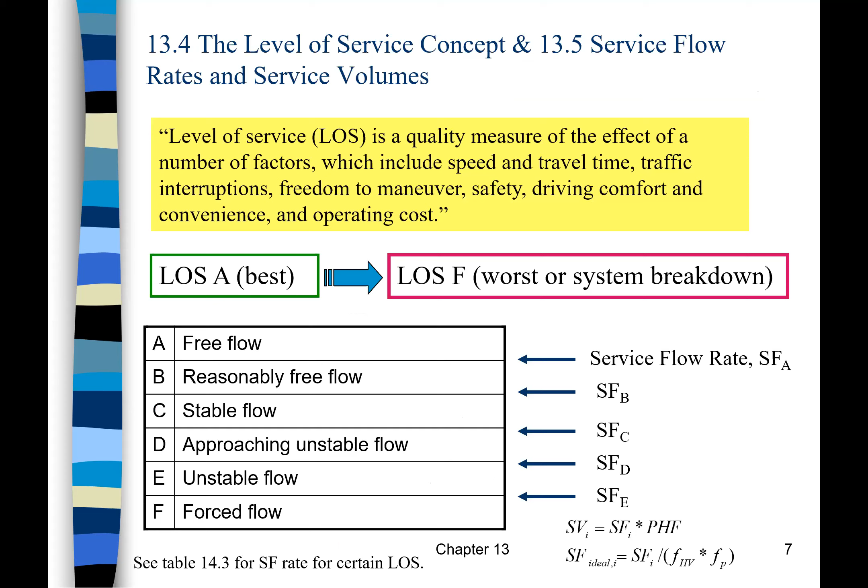One, during a peak hour flow in the evening, 4 to 5 p.m., the capacity may be reached, and the flow of traffic looks like it's less than capacity because the traffic is jammed. When the traffic is jammed, you notice that the flow cannot exceed the capacity, right? So, but if you know the other one, which is the speed, you will get it right away

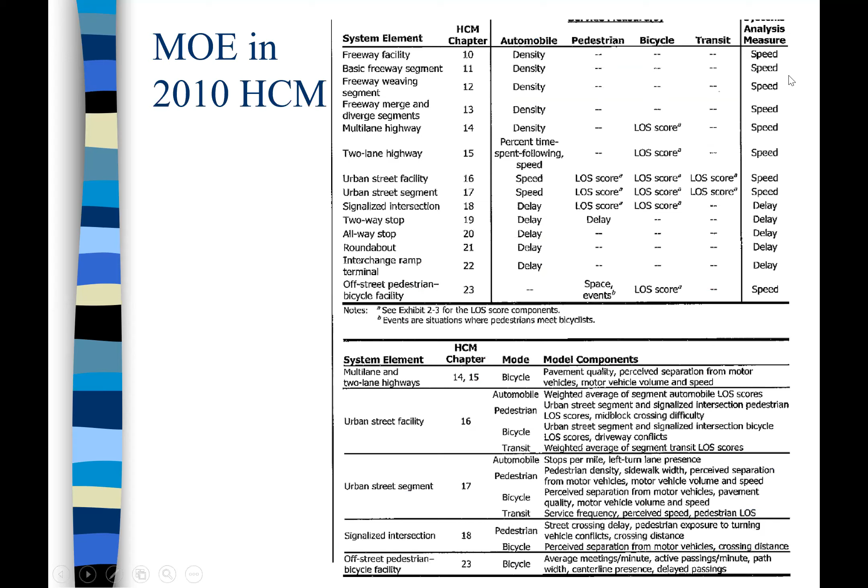whether the V over C is at where, compared to the same V over C when the speed is high at almost 50 miles per hour. Volume, free flow, the car can flow, but there are not many cars. The condition of the road is good, level C or D, that shows it's the same VOC too. So when you compare it, you need to also give the right measurement of the speed here, whether it's above or below.

Okay. V over C is usually less than or equal to 1. If V is equivalent to C, it is 1. However, if a projected rate of flow is used, that means if you are going to propose a future corridor, like expansion, you may expect a VOC greater than 1, because the demand volume is higher than the capacity.

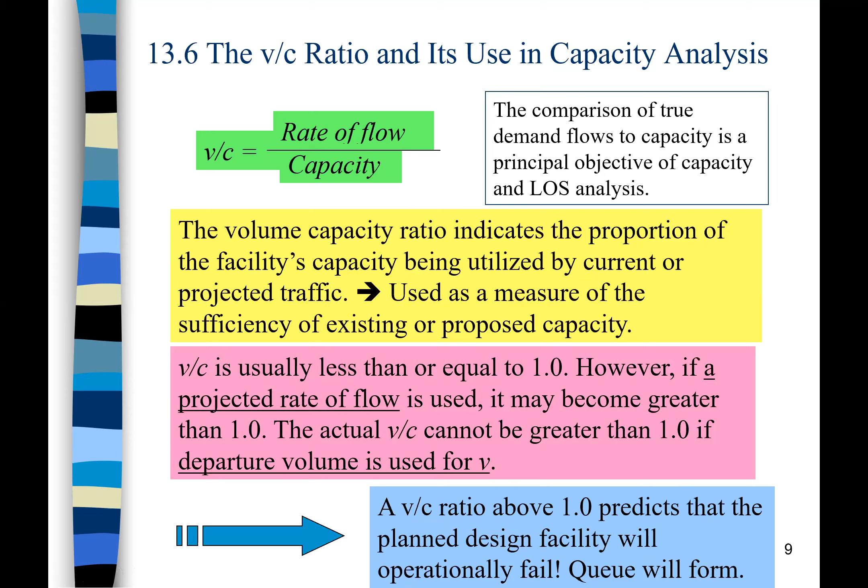Okay, so just one condition. If you are going to propose the future, then the demand can become much more than the existing volume, and it could be greater than capacity. So in other conditions, VOC should not be greater than 1. Okay. Here, a VOC above 1 predicts that the planned design facility will operationally fail. Queues will form. Okay. Yeah, it's already happened in Bangkok.

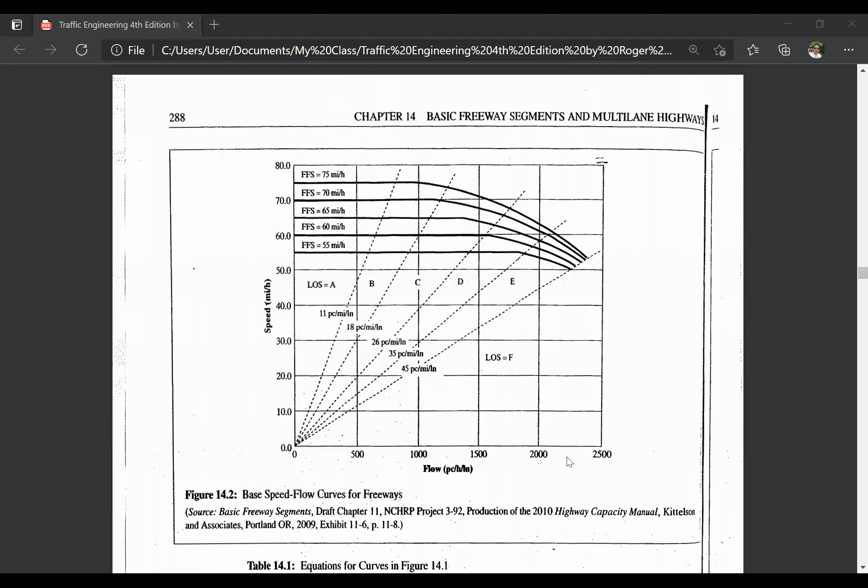Okay. All right. So what time is it? Almost 8 o'clock. I will stop here at this chapter, and I'm gonna continue again on Thursday with the other slides and maybe a little more of other materials. If you don't understand, you can call or ask me, or you can look at the materials, this textbook, traffic engineering. Because I want you to be able to calculate some of the examples here.

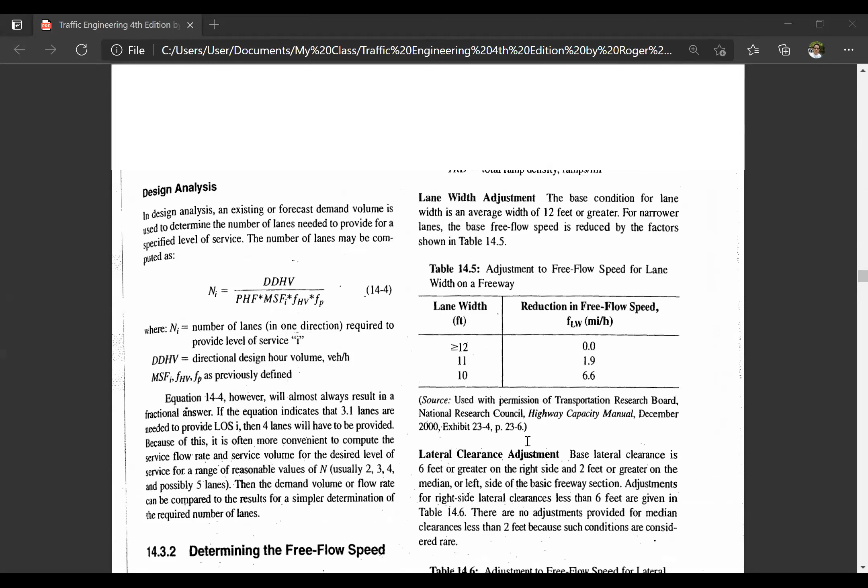Okay, the PHF, peak hour factor, right here. Yeah. We will come back on Thursday and look through all this, so you can get the idea of how you can calculate the level of service or even the design analysis. How many lanes should you accommodate for the number of vehicles in the future if you were a designer to make this road at a certain level of service.

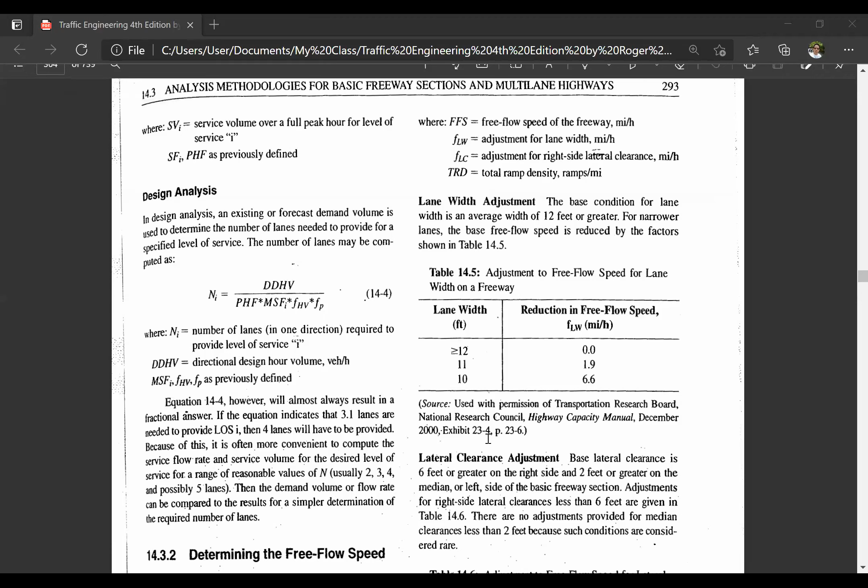Okay, at this point, any questions? Nope, no questions. I feel like when I talk alone, I'm so lonely.